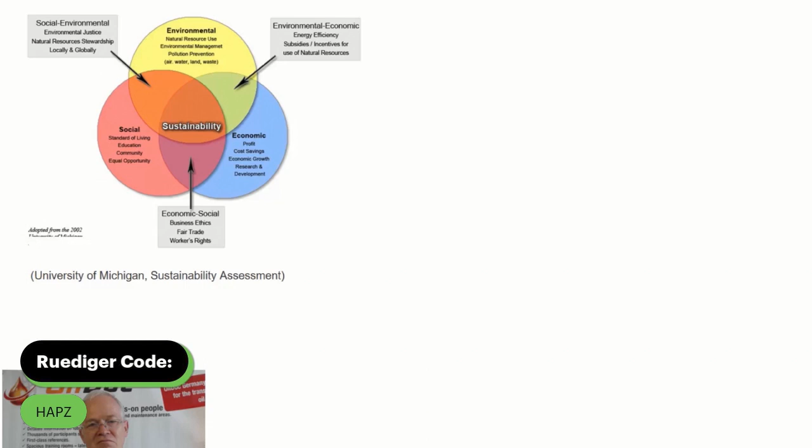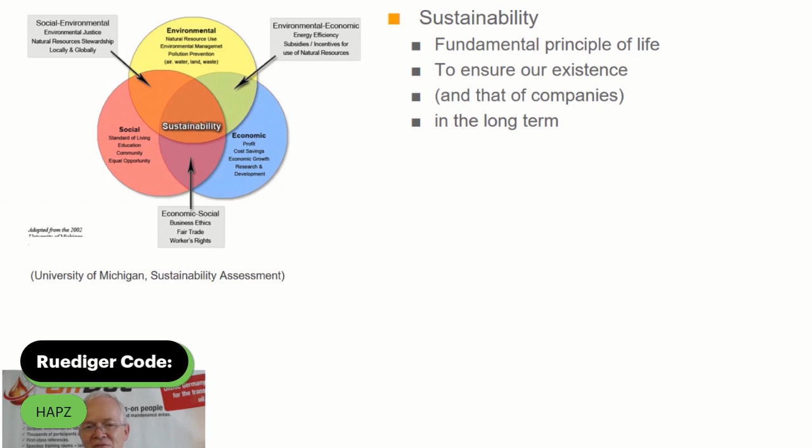Sustainability, what's that? More or less, this should be the fundamental principle of our life, to make our existence safe for a long time. Or with other words, how we work with our environment, what footprint we put on the planet we are living on, and this in the long term.

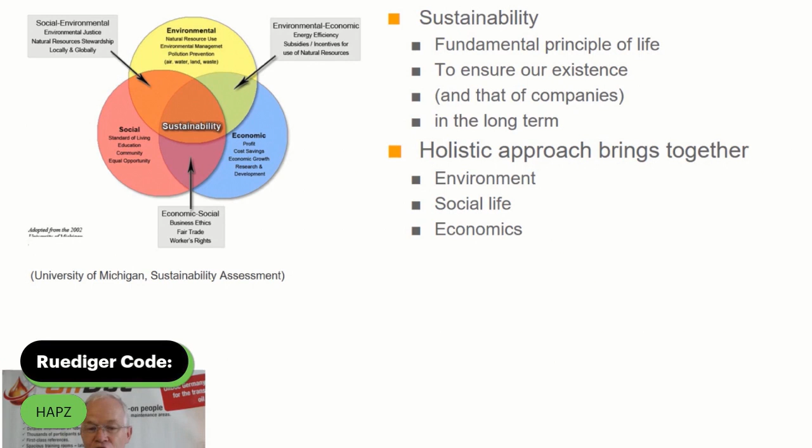A holistic approach brings it together: the environment, the social life - we are human beings - and the economics. Very often people think sustainability is a costly thing, but I'm not sure this is right.

Today you will hear the word sustainability very often from politicians and on the top floors of bigger companies' management. Sometimes, if you go into detail, you'll see there are prestige projects like a light tower, very visible, focusing only on single aspects, but at the end of the day the world is not changing too much.

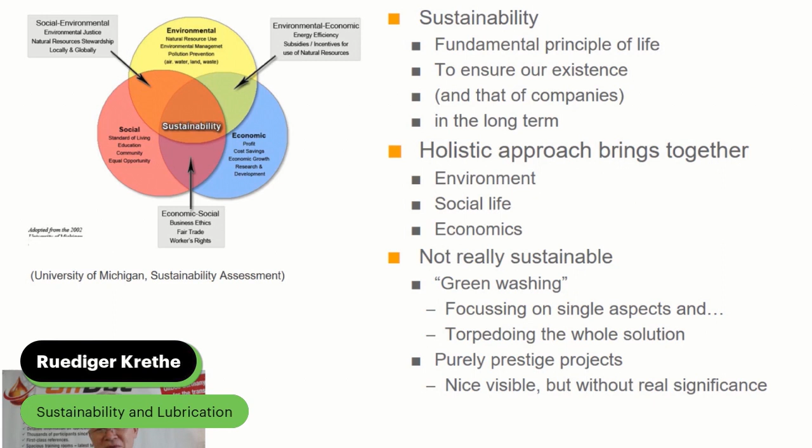What about sustainability and lubrication? Several studies bring it up: we lose billions of dollars per year due to poor lubrication practice. Energy consumption is one thing, and the next is materials we are working with - how long we use them, and the oil, of course, at the end.

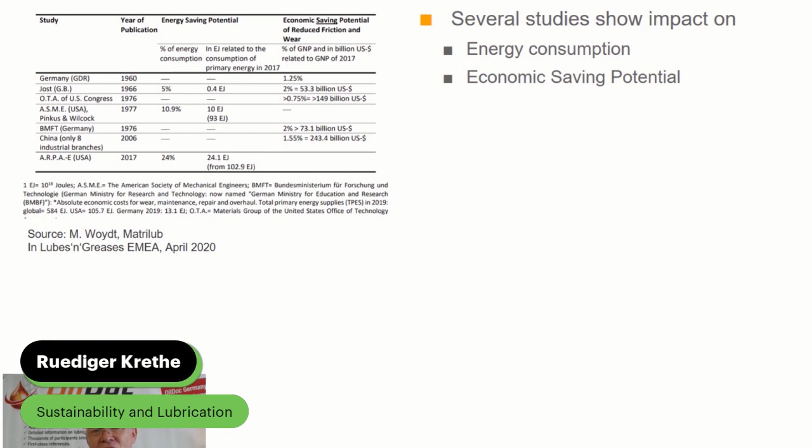But how to do it better? Minimizing frictional losses by better lubrication, better materials, better machinery design. And the materials, of course, if they have a higher wear resistance, we can use them longer. Today we have one overall measure for that: the CO2 footprint.

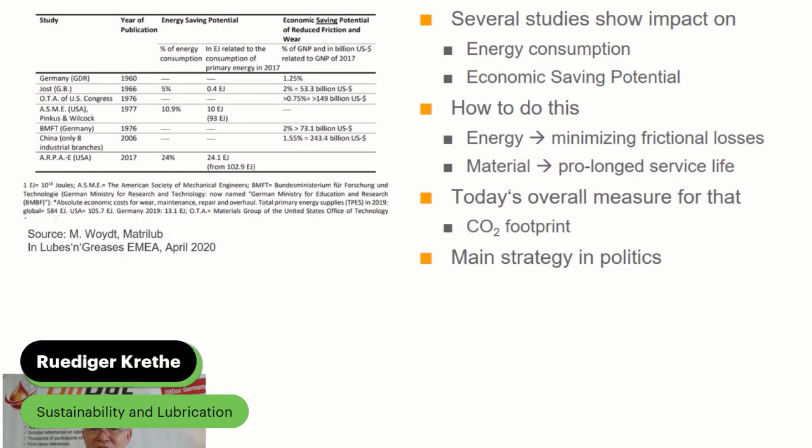And if you go to the politics, I'm not wondering that their main strategy is: we have to have new machinery, they have to be designed to be more efficient, we use materials with maybe higher wear resistance, we have better design, we have better lubricants. And it's good and right and crucial in doing that. But is that really all what we should do?

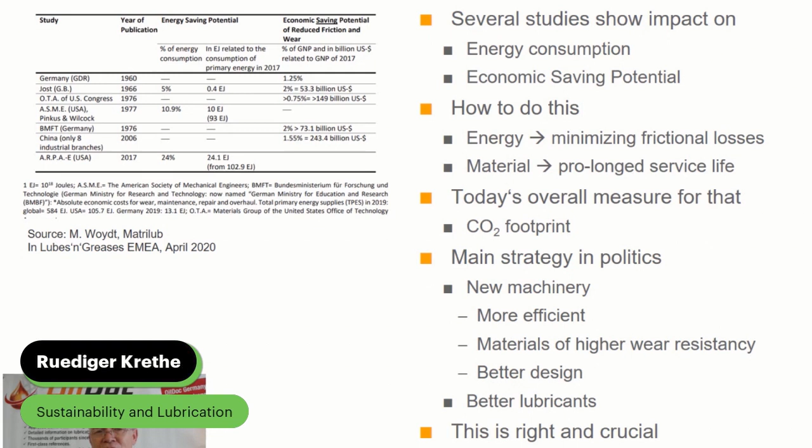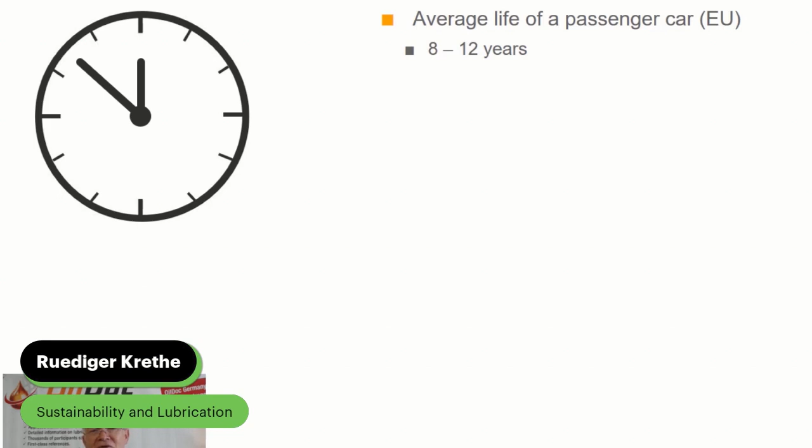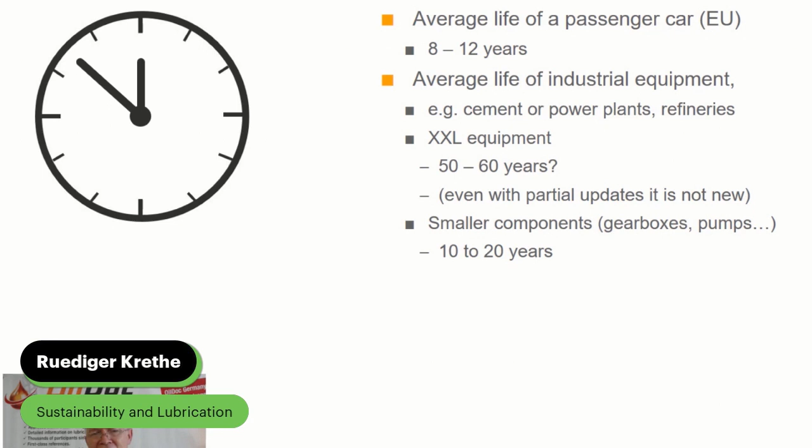Let's put a realistic timeline on that. The average life of a passenger car in the European Union is approximately 10 years. If you go to large industrial equipment like turbines or turbo compressors or other bigger machinery, then we talk about 50 to 60 years - and even if you put some updates on that from time to time, they are not new. Smaller components can have a lifetime like the passenger car, sometimes even much longer.

What's the problem? Michael Duncan, president of the Society of Tribologists and Lubrication Engineers, brings it to the point: even if we begin to replace internal combustion engine vehicles today with battery electric vehicles, it will take 20 to 50 years before a significant impact on global warming can be achieved. 20 to 50 years - what can we do in the meantime, how can we improve sustainability today?

We can modernize our machinery. We can use better lubricants. We have better lubrication practices we can apply. And especially tailor-made service concepts can do that.

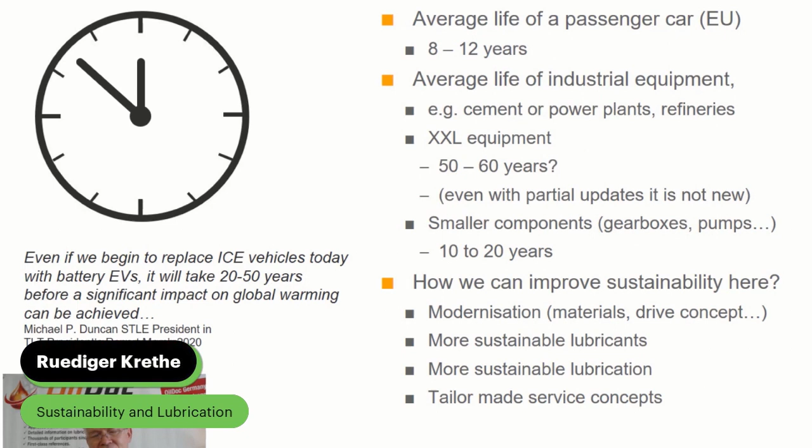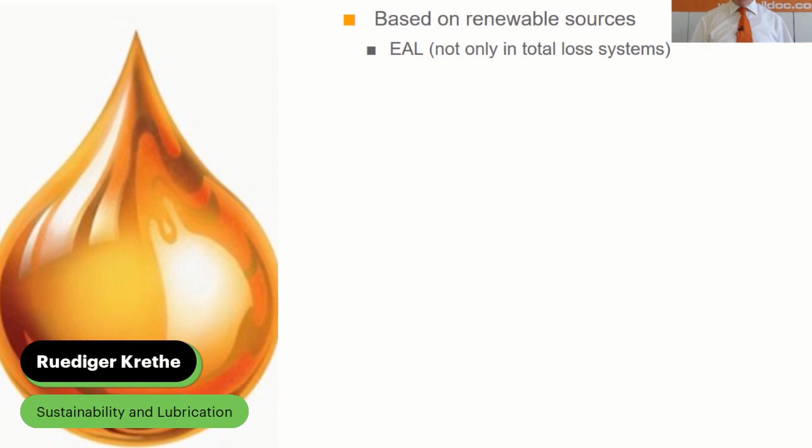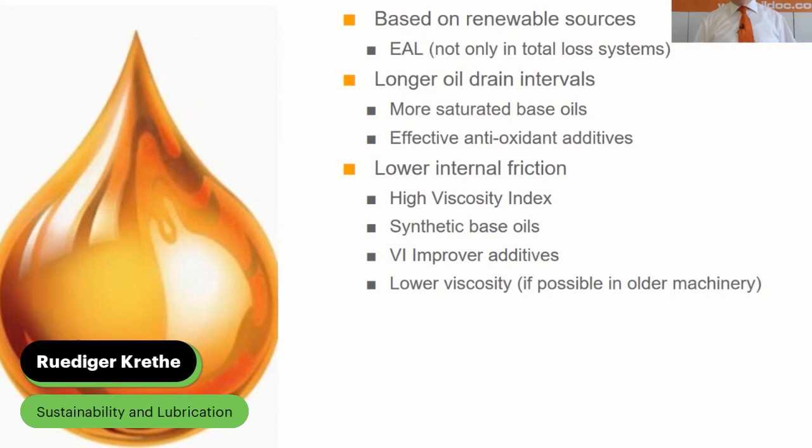More sustainable lubricants - of course we talk about lubricants based on renewable sources, bio-lubricants. And not only in total loss systems, but also longer oil drain intervals when we use more saturated base oils, better additives, and lower internal friction due to a high viscosity index. We can work with less internal friction of the lubricant, and of course with better additives when we use them mainly for lubrication.

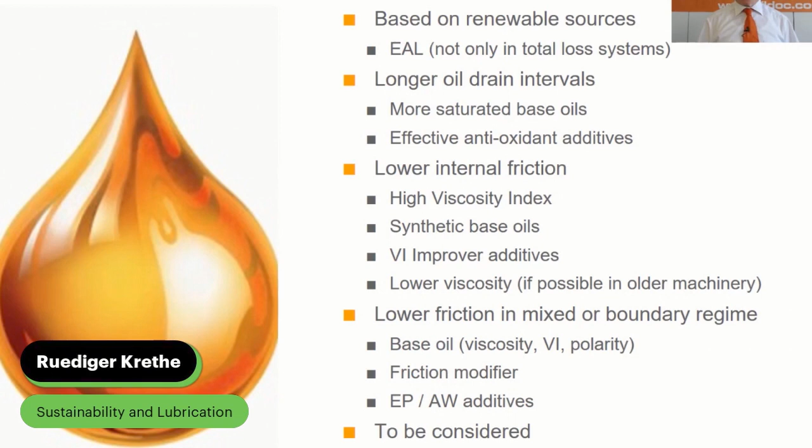And of course, at the end of the day we should keep in mind that if we use a different chemistry, we should think about material compatibility, mixability and so on. But we can handle that - we know that for years. Bio-lubricants and hydraulic fluids.

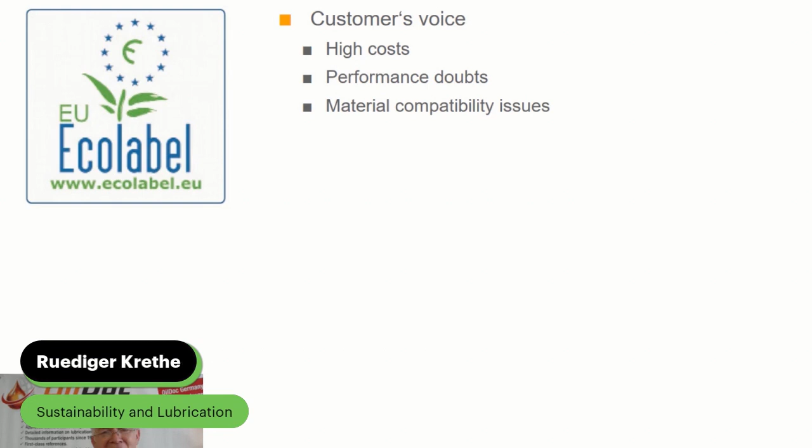Customers, if you ask them very often, they say, hey, biofluids are costly. And what about the performance and the material compatibility? I don't know, I have doubts about that. But go to the reality.

There are also big advantages. They have a higher viscosity index and are shear stable. If you go to esters, for example, we have higher oxidation stability, and ester-based lubricants, due to their high polarity, have better lubrication capability than the base stock of a mineral oil or polyalpha olefin. The material compatibility is different, but we know those lubricants for more than 20 years, and we can handle that.

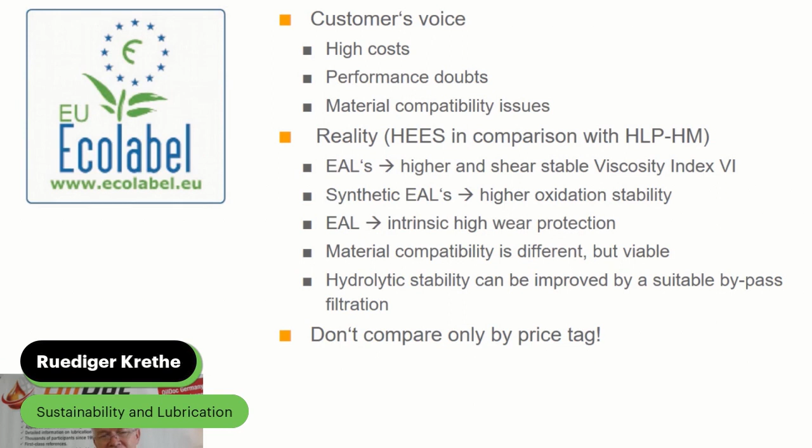And the hydrolytic stability you can improve. Here you need a better service concept like bypass filtration, get the water out. Therefore, don't compare them only by price tag. Put all things together and at the end of the day you will see it's not that costly as you were thinking in the beginning. Some examples later on.

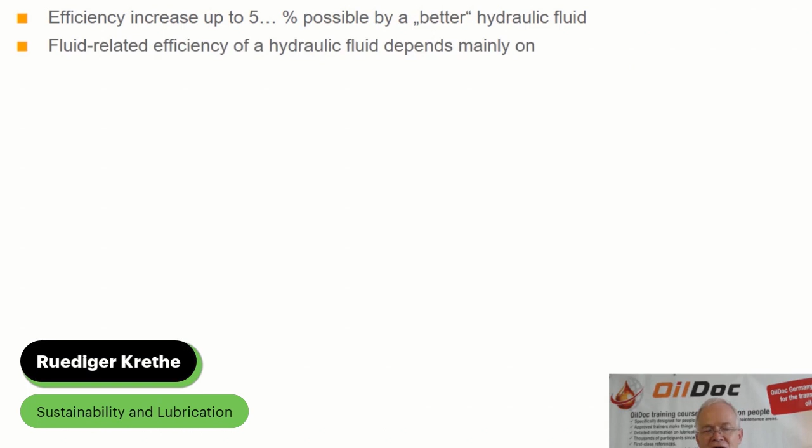What about energy efficiency of hydraulic fluids? Using a better hydraulic fluid, you can increase the energy efficiency up to 5% and more. The fluid-related efficiency of a hydraulic fluid depends mainly on viscosity, viscosity index, and density. The density is very often not in focus.

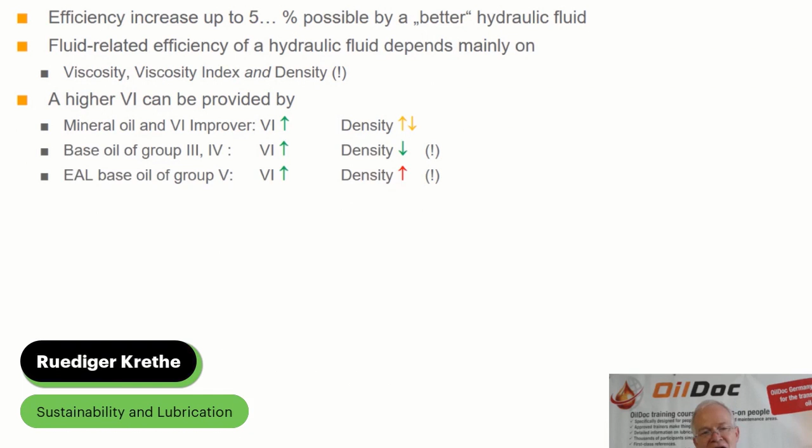And now you have different solutions. Mineral oil and viscosity index improver, a base oil of group 3 or 4, that means hydrocracked, or polyalpha olefin. You will see the viscosity index is high, the density is low, that's good. Some of the esters, they have even a higher viscosity index, but the density is higher.

And therefore it depends on application which is the best solution in energy efficiency and the costs if you put it together. And if you want to find out if it's really energy efficient or not, the easiest way to get an indication is to measure the fluid temperature in operation and compare that. The real consumption is very complicated to measure.

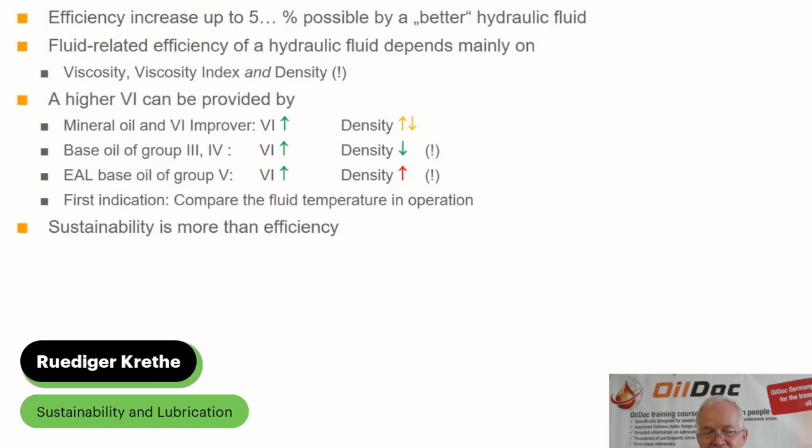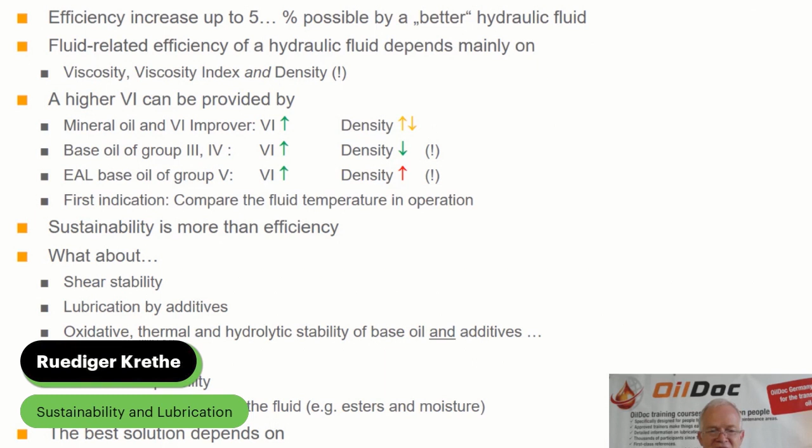But sustainability is more than efficiency. And if we talk about the costs, what about the shear stability? We can use them longer due to maintaining the right viscosity, and the oxidative, thermal and hydrolytic stability. That means a longer oil drain interval, material compatibility, and so on. And if we again put the different service needs of these different fluids together, we can get it. Therefore, the best solution depends on machinery design and the operational factors we have.

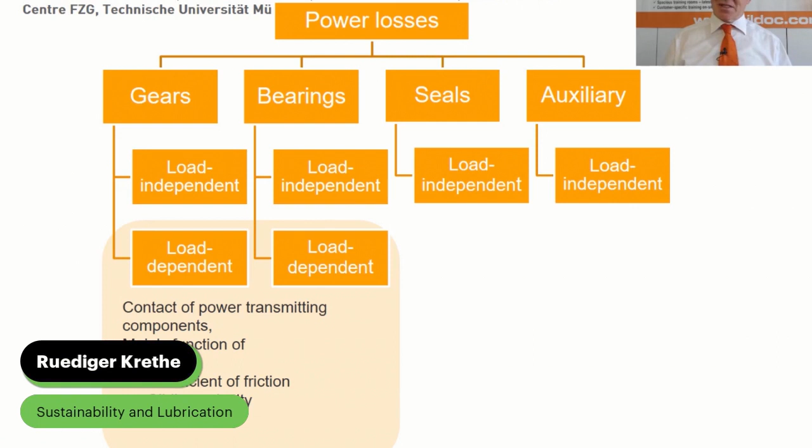Gearboxes and power losses - there you have two classes: the first, load dependent; the second, load independent, auxiliary. What's behind this? You can have the same type of gearbox, but operate them differently, with different influence factors. That means if the gearbox is running at nominal load and speed, the losses are dominated by load-dependent losses - that means lubrication, additives have a big influence there. But in the load-independent losses, viscosity comes much more into play than the additives you have.

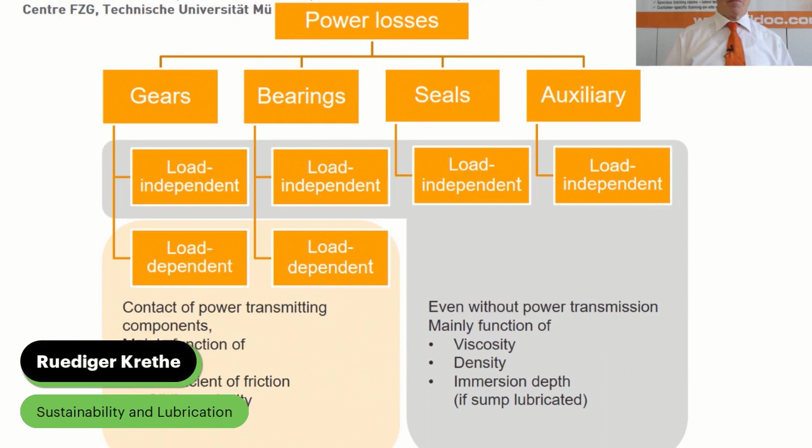Some examples - a cement plant. The idea: we replace a 1,200 liter hydraulic system of a clinker cooler drive with a polyalpha-olefin. It was operated with a mineral oil. The first reaction of some colleagues: hey, you are stupid, that's so costly, why in the world you want to do that? But that's not the end. They said, hey, we will do the same thing in the main drive of a cement mill - kick the mineral oil out and replace it with a fully synthetic polyalpha-olefin, 2,800 liters.

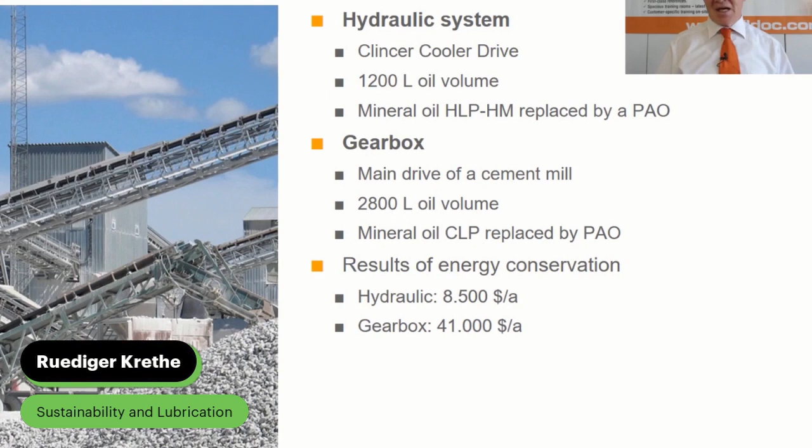And then they measured the energy consumption and realized the following: they saved 50,000 bucks per year. And that means at the end, after approximately 1.5 years, it was break even. And then they started to earn money with that - the return of investment less than 2 years. And now, because of the use of synthetic oil, each year they save a lot of money.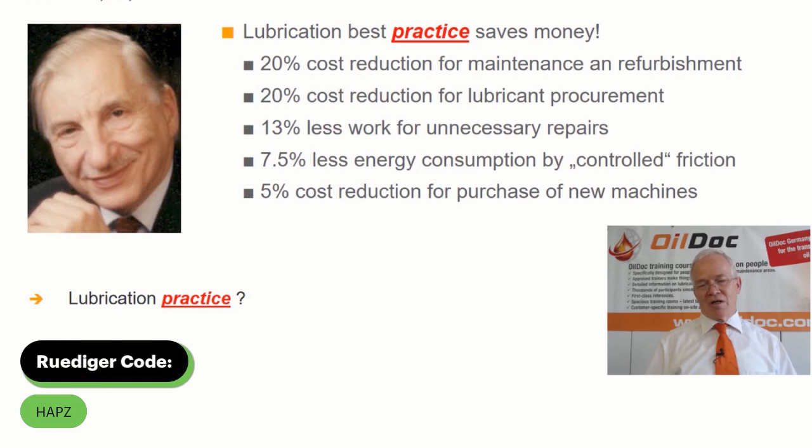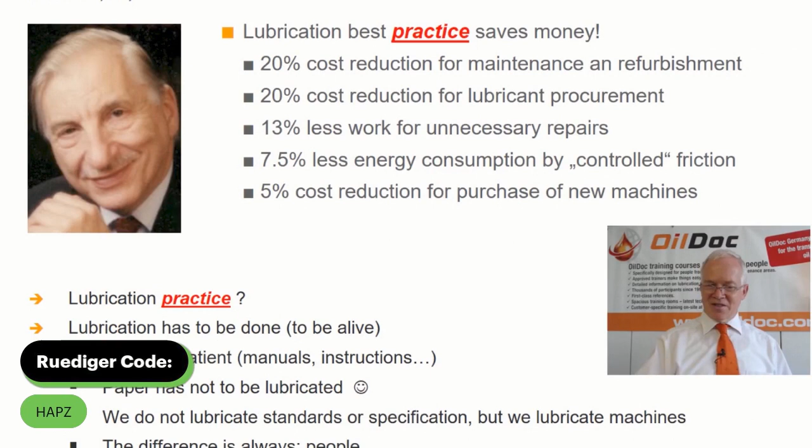But lubrication practice has to be done. It's not enough to write a nice manual. The difference is made by people - people with an eye for the right detail, and without losing the view to reality.

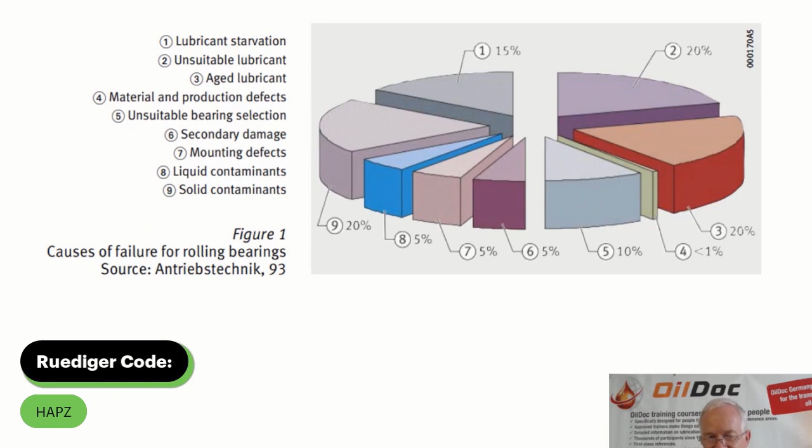What about rolling bearings and lubrication? Failures and lifetime - you will find many publications, many graphs on this. If you sum it up, approximately 80% of the failures of these bearings are related to lubrication and contamination. And these are things we have a big impact on with our daily work. 80%.

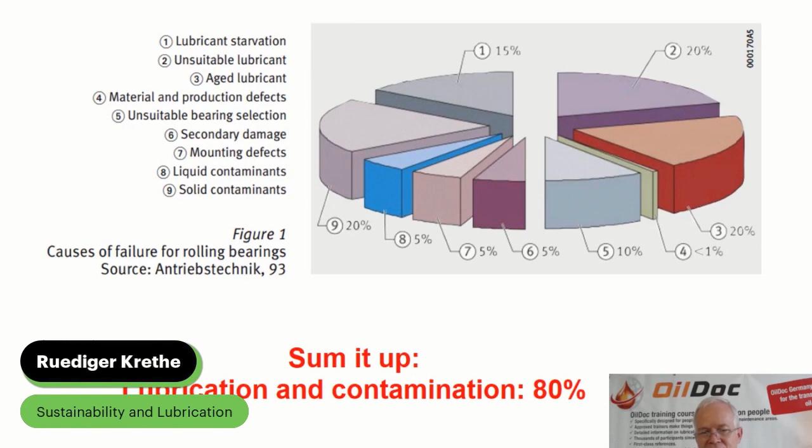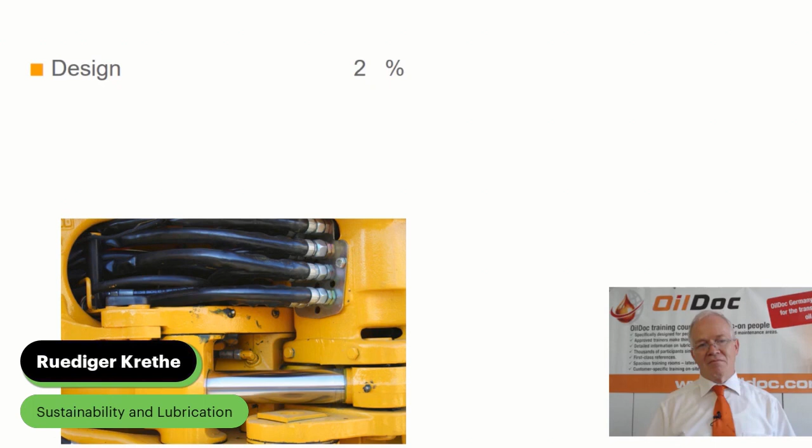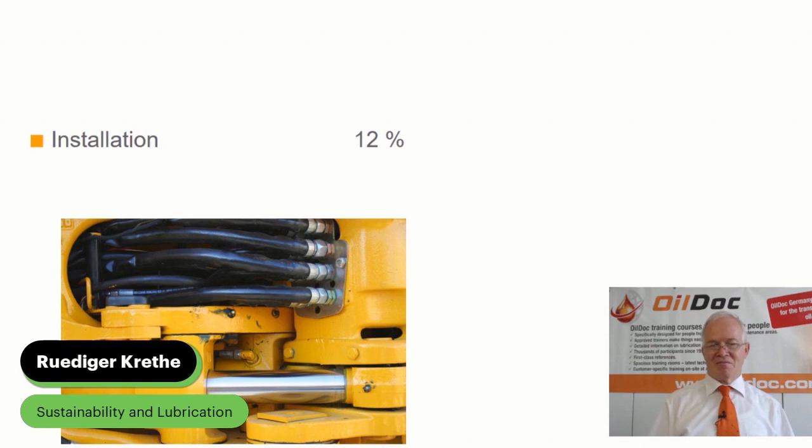Hydraulic pump failures - more or less the same story. If you put it together: by design, 2%, it's nothing more or less. Manufacturing, 6%, 3 times higher. Installation, 12%, even 2 times higher. But now the end of the story - maintenance and operation, more than 80%. 80%. Do you know Mr. Pareto?

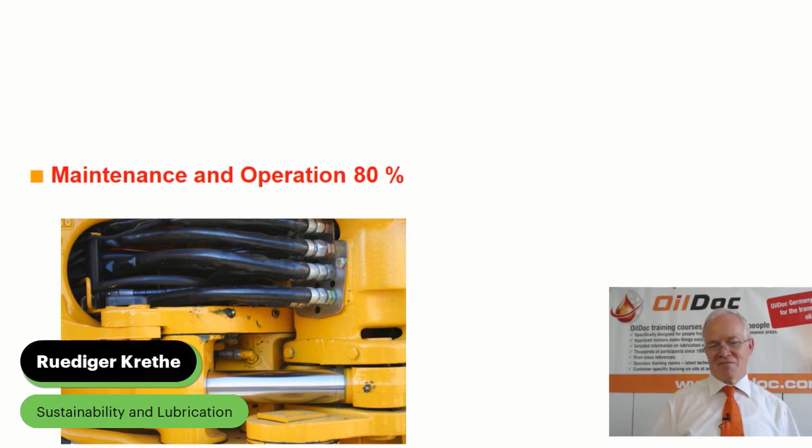Bad news about lubrication and failures. Failures are caused by lubrication and maintenance, as you have seen here, in rolling bearings and hydraulic pumps, by 80%. But in my opinion, these are not bad news.

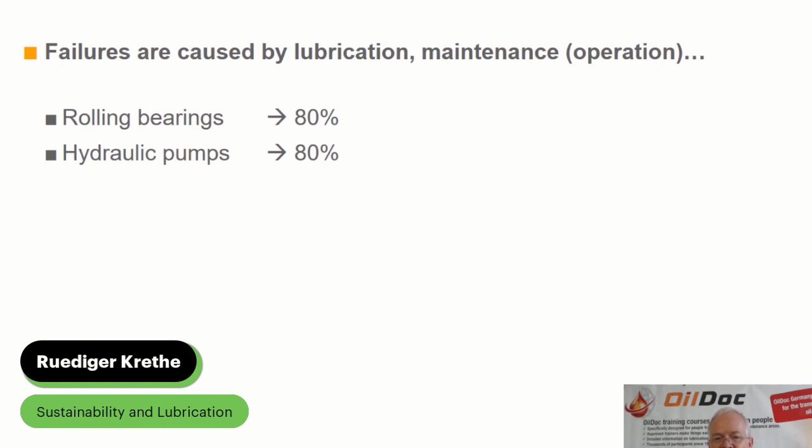These are good opportunities to bring our sustainability and our economics to a better level. The good news is, following easy rules, we can avoid the majority of our premature failures of lubricated components. Pareto means following easy rules, 80% you can get out.

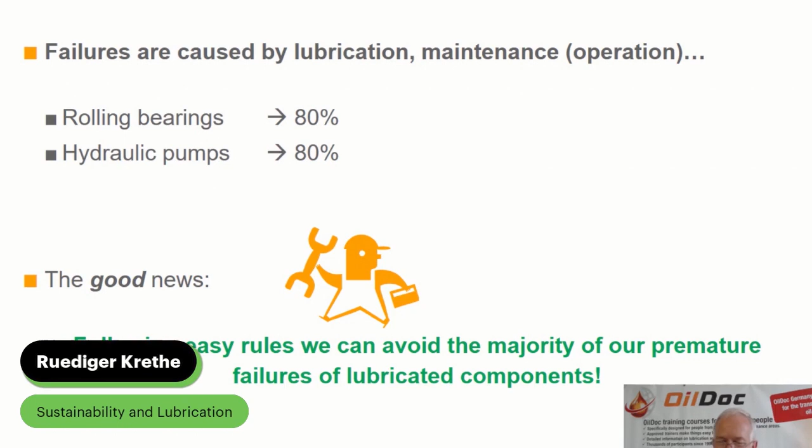Lubrication excellence, 7 rights: the right lubricant, the right place, amount, time, method, condition. You know that from many trainings and seminars, so I will not go in detail here. But the main difference, again, are people - people not only knowing that, but doing that. And of course, here the management and the people in daily work have to collaborate to bring it to a better level.

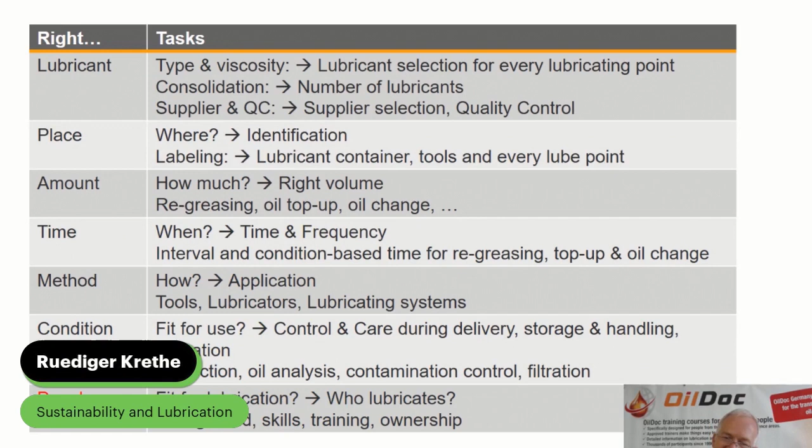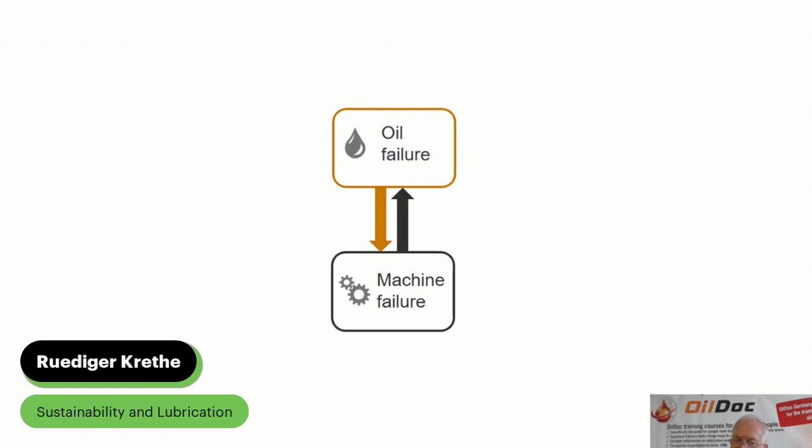Oil and machine condition monitoring concept. What's behind it? The oil can fail, the machine can fail. And of course, if the oil is in bad condition, even the machine will not become a better condition, and vice versa. For both of them, there are root causes for failures. Knowing that leads to better practice.

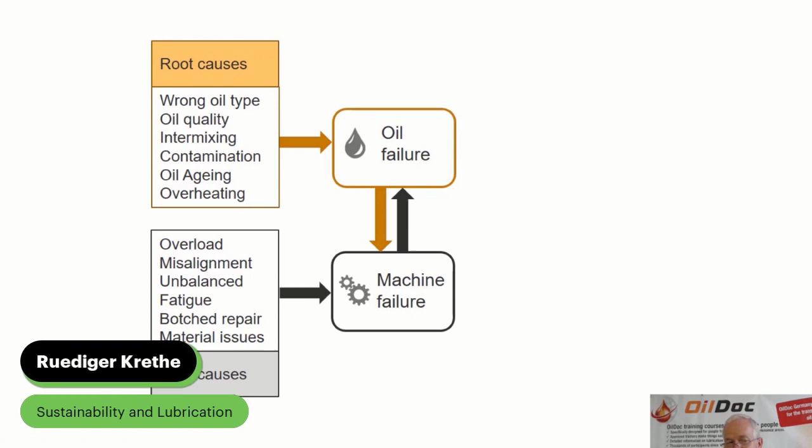But of course, we can also monitor our oil and our machinery to get out what is the condition, to react as early as possible for corrections. And of course, we have to put together the consequences, and we have to balance how much money we put into condition monitoring and all those things, and how much money we earn from that.

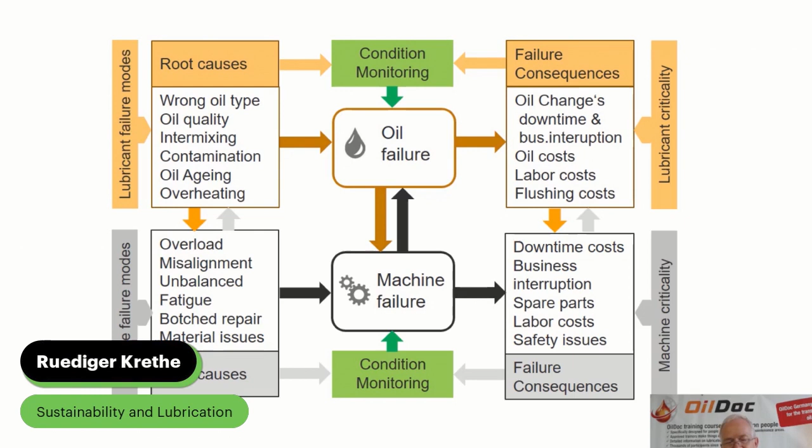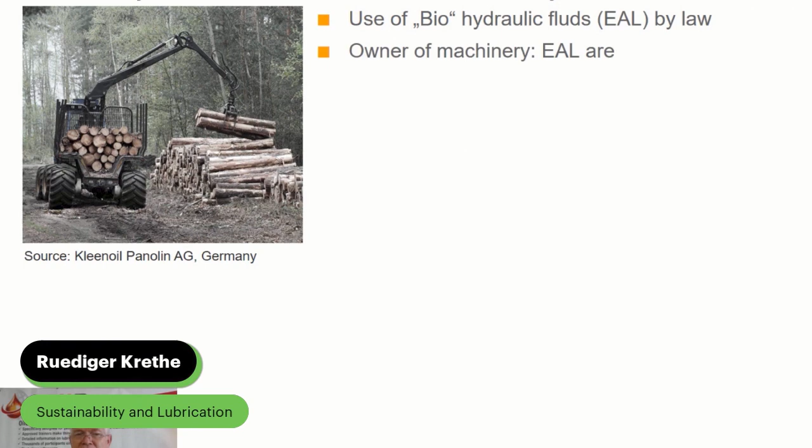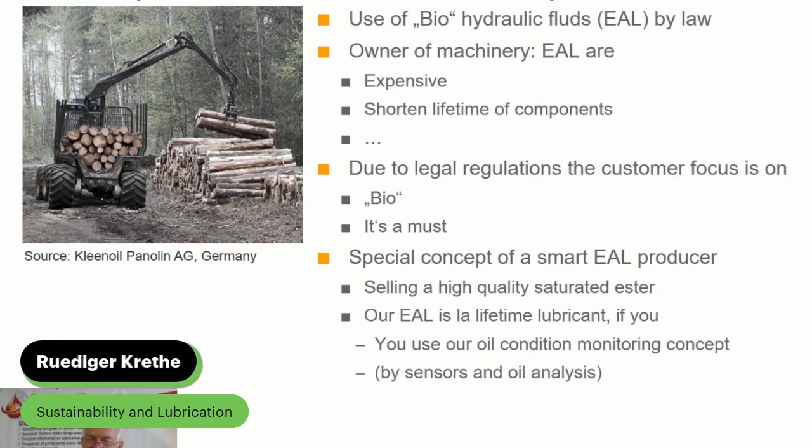Individual service concept: biofluid and forest machinery. Here in Germany, the use of biofluids is more or less required by law. But the owners, of course, say it's expensive, short lifetime of the components, and so on, what you can hear very often. But it's a must, and therefore the focus of the people is only, I have to do it in bio, and that's it.

But a smart producer of those fluids, not a very big company, but they have a very nice concept, selling a high-quality saturated ester with superior oxidation stability. And when you look at what is the main influence, what more or less destroys the components and our oil?

Contamination in hydraulics, and for an ester-based fluid, water. They have a very nice oil condition monitoring concept using sensors and oil analysis, using special in-depth filtration to get the contamination out - particles and water - and don't mix or top up with other fluids, to keep as long as possible a very good condition of the oil. And then the price of the oil is more or less not very important.

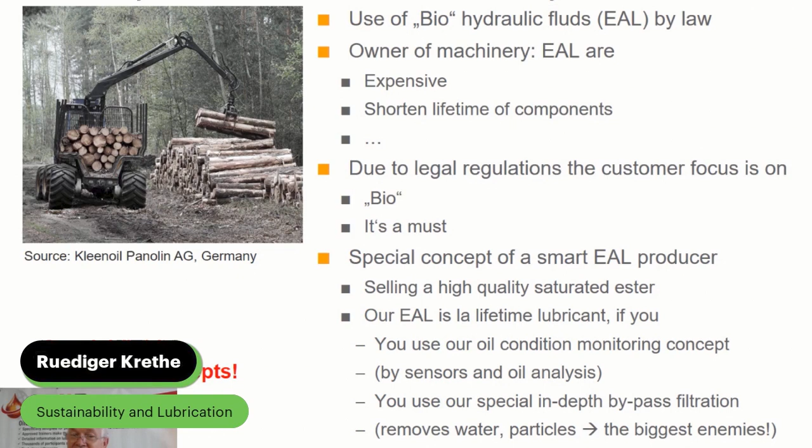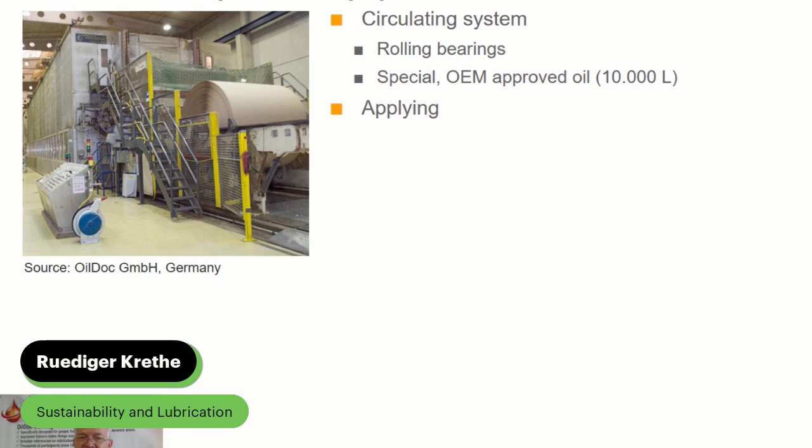Special fluids, special concepts: lubrication in a dry section of a paper machine. Circulating system, rolling bearings, a special approved oil, approximately 10,000 liters. And what they did was apply a clean principle to all lubricants from storage to disposal.

They monitor the oil on a regular basis by sensors and oil analysis, and they renew 1,000 liters of oil every year - drain and top up - and clean up the oil permanently by additional in-depth filtration. The goal: they avoid total oil drains and flushings as best as possible.

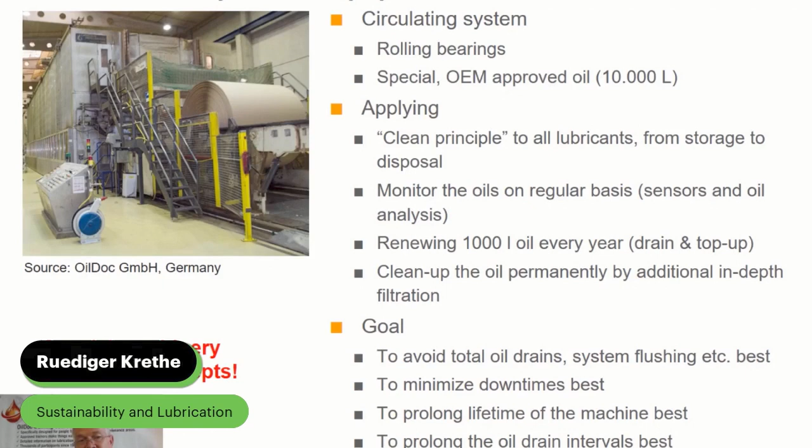This minimizes downtimes, and because of the downtimes, they save money. It prolongs the lifetime of the machinery and the oil. They earn money with that - special machinery, special operation. Let's sum it up.

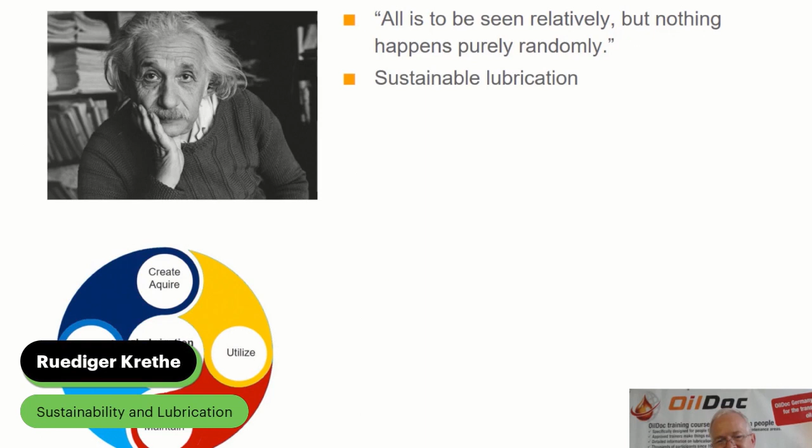Mr. Einstein stated, all is to be seen relatively, but nothing happens purely randomly. Even sustainability and good lubrication will not happen randomly. It's a concept in managing lubricated assets. Write it down: sustainability wins, reliability increases, and the costs decrease.

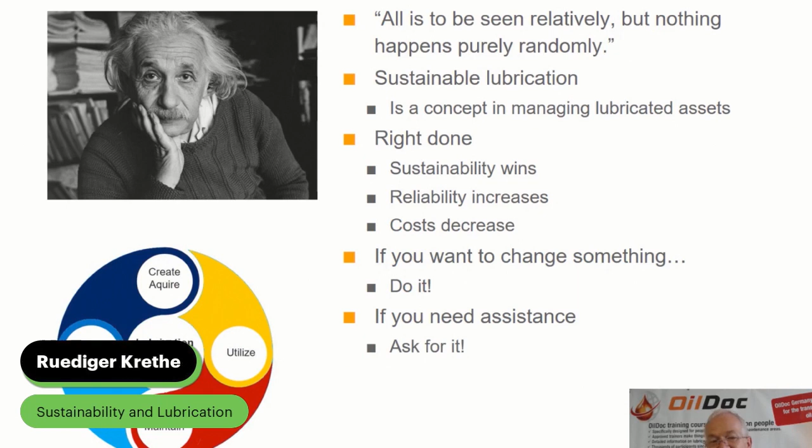And if you want to change something, there's only one way: do it. And if you need assistance, ask for it. Ask for the right education course. Ask for people who work and have experience in applying the ICML regulation 55.1 and 55.2. Thank you for your attention.

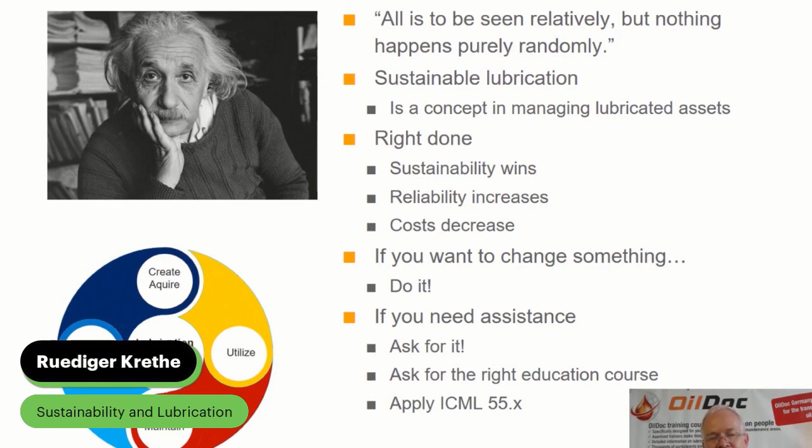Thank you, Ruediger. It was really a great presentation. I'm enjoying watching it for the second or third time already. And this morning we had a panel as well, you and me, on sustainability, and there were many good interesting points.

I have one comment here from Paul, who says he likes the diagram of the vicious cycle - oil failures lead to machine failure, which leads to oil failure, which again leads to machine failure. So it's something that when you dissect the problems, it's quite evident, but too often people don't monitor and don't use the right lubricant to start with.

Just one question on that: do you see in Germany, for instance, and in Europe with your customers, that people are more and more conscious about the importance of doing good condition monitoring?

Yes, you can say it is, but it's not that much we want to have. And therefore we discussed even this morning in the panel, what about oil sensors?